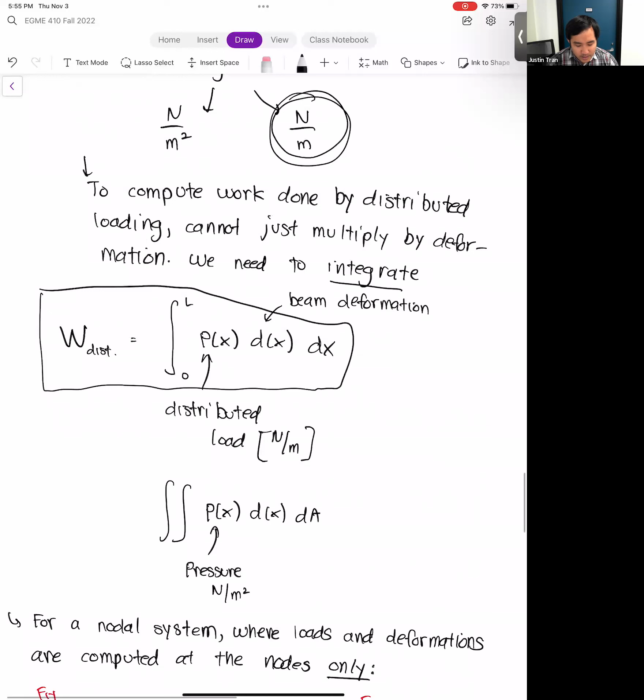All right, any final questions on this? Are you allowed to resubmit the final project? What do you mean by that? You're only submitting the final project once. Oh, before, yeah. If you submit it before the due date and you want to make some changes, you can submit another copy. That's totally fine. As long as it's before the December 9th deadline or December 19th deadline, you can submit it as many times as you want. Okay. So all that information is on Canvas, so feel free to take a look to your heart's content.

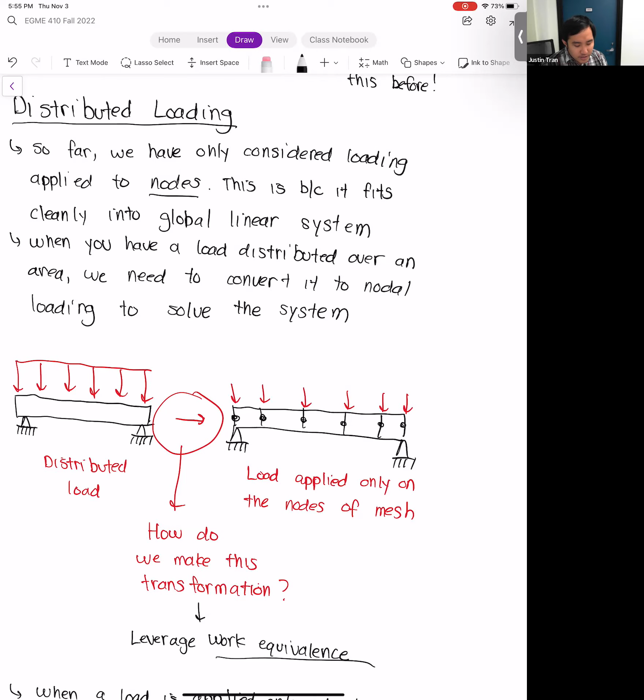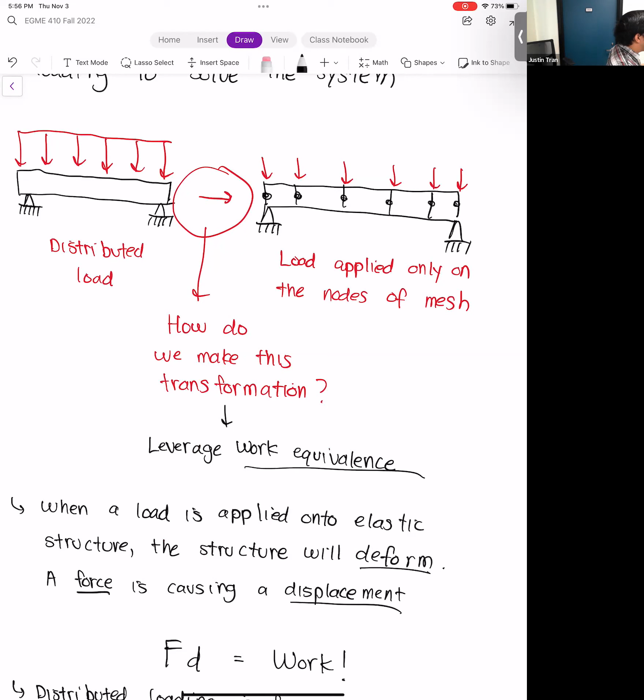Okay, so let's go ahead and come back to where we were on Tuesday. To save myself some time, I'm going to scroll up here, because where we left off on Tuesday was talking about this idea of distributed loading. The idea with distributed loading is that a lot of times when you're doing finite elements, the loads that you're applying onto a subject are distributed over a certain area, over a certain line in this case. But that's a little bit inconsistent with what we've been doing with the direct stiffness method, where all of our loads are applied at the nodes. And so we have a disconnect.

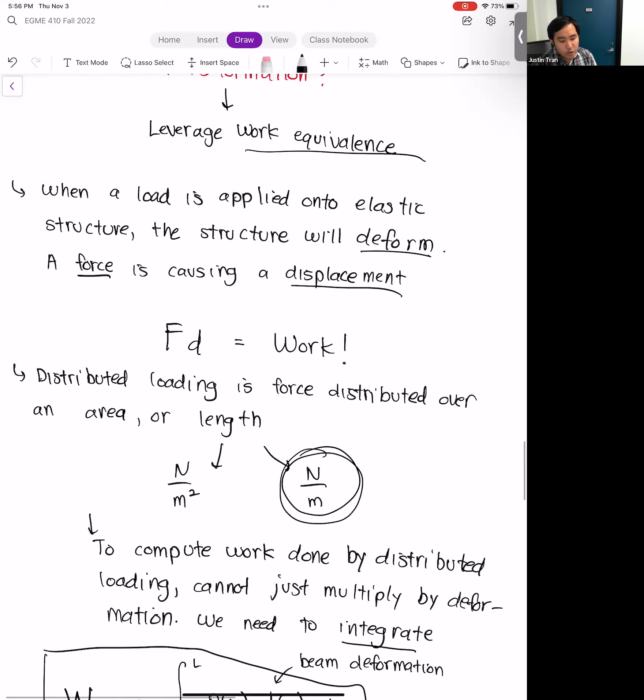On the one hand, we like to apply our boundary conditions distributed over an area, but in order to actually do computations on it, we have to convert those into nodal loads. So what we're doing now is basically looking at a way to do this conversion. How do we go from a distributed load, which is this continuous function, and transform that into discrete nodal points and make sure that they're equivalent? To do this, we utilize this concept called work equivalence.

And so basically the idea behind that is no matter what form the load is, whether it's in a distributed form or whether it's in a nodal form, it's going to perform some work on the structure. And so it's going to cause it to deform. And then if we multiply the force of the loading by the deformation, that's going to give us the work. And what we said is that no matter what form the loading is in, it should perform the same amount of work because it should be the same loading. And so what we have here is kind of these equivalent statements right here.

And so what we say is that if we take the integral of the distributed loading, so this P here is distributed load, where for this part we're going to assume the distributed loading has units of newtons per meter. So it's a line load, a load that's distributed over a line. We multiply by d of x, where this d of x is the deformation of the beam. If we integrate that with respect to dx, which is the dimension along the beam, this is going to be equal to all of our nodal loads.

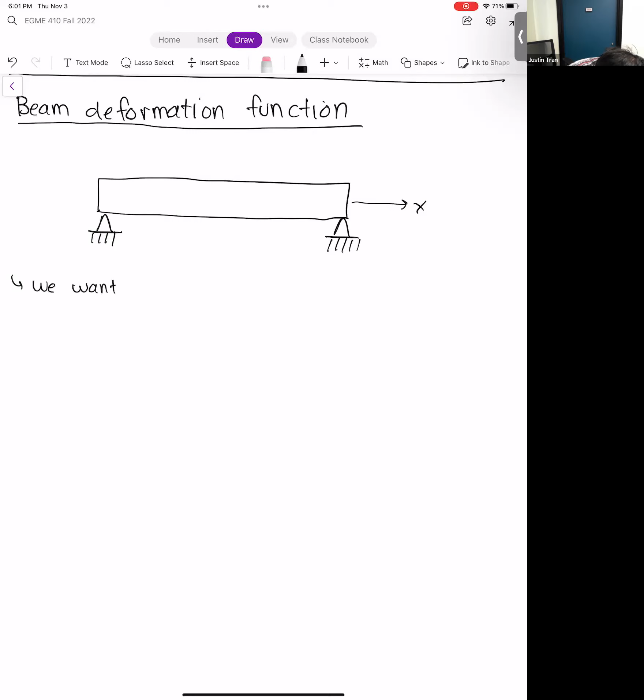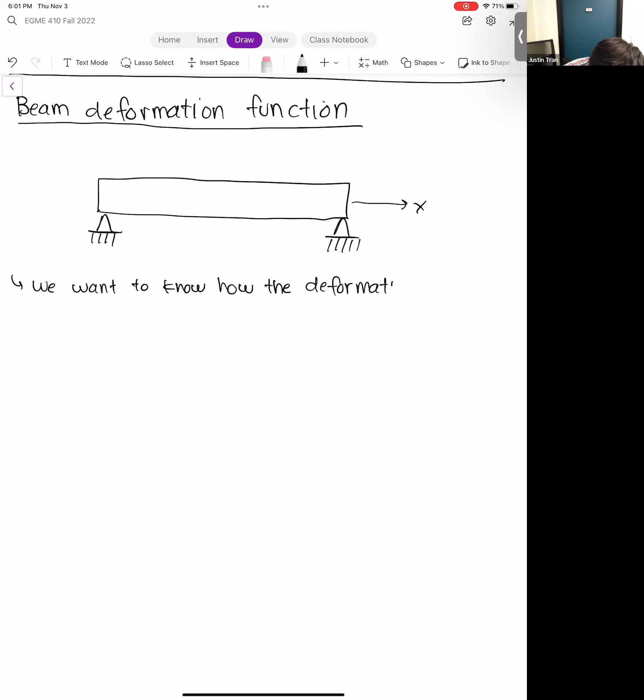Okay, so actually, let me come down here, and let's talk more about this beam deformation function. Draw beam. So here's our beam. We'll assume that the X direction is this way, so the X direction goes along the beam. And so what we want to compute is how the deformation changes as a function of X down the length of the beam.

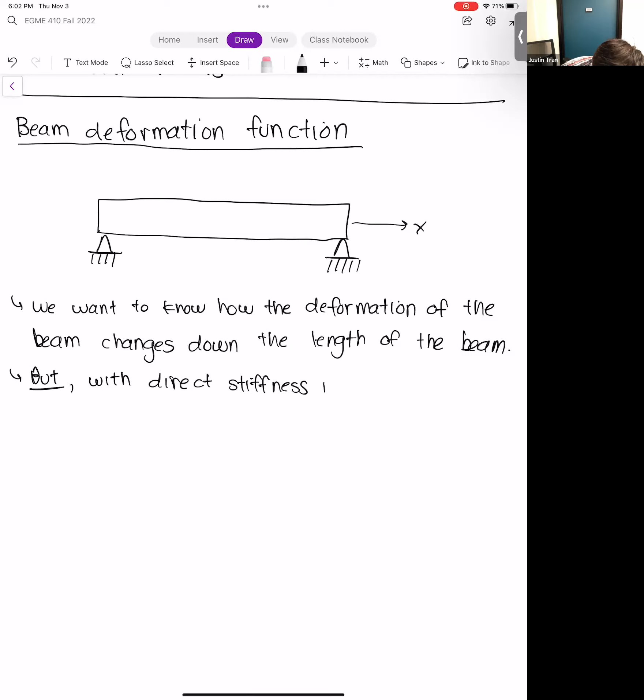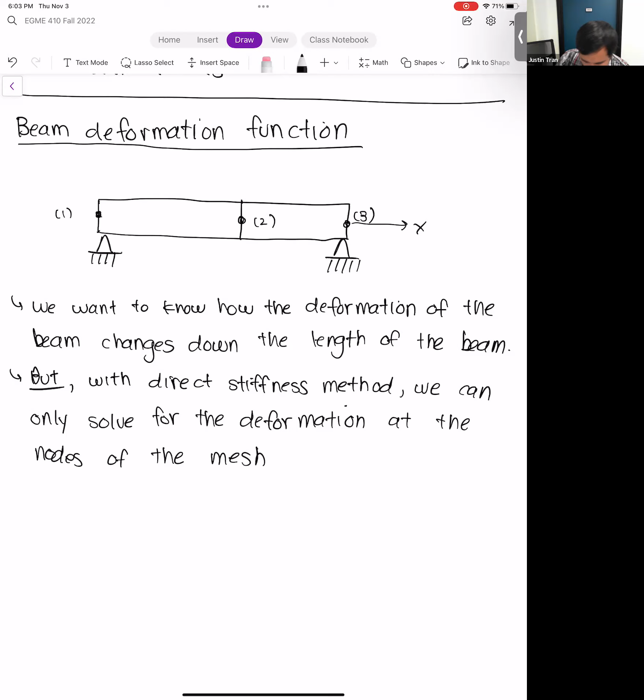The only problem with this is that we haven't come up with such a function yet. If we think about all the direct stiffness problems that we've done, we're only able to solve for the deformation at the nodal points in the mesh. We don't get a continuous function. We only get the nodal deformations. And so we kind of have to reconcile these two ideas here.

Because let's say that we split this beam up into two. With the direct stiffness method, we'll be able to compute the nodal deformations at node 1, node 2, and node 3, those distinct locations. But when we say that we want d of x, we want to know how the deformation varies in the space between the nodes.

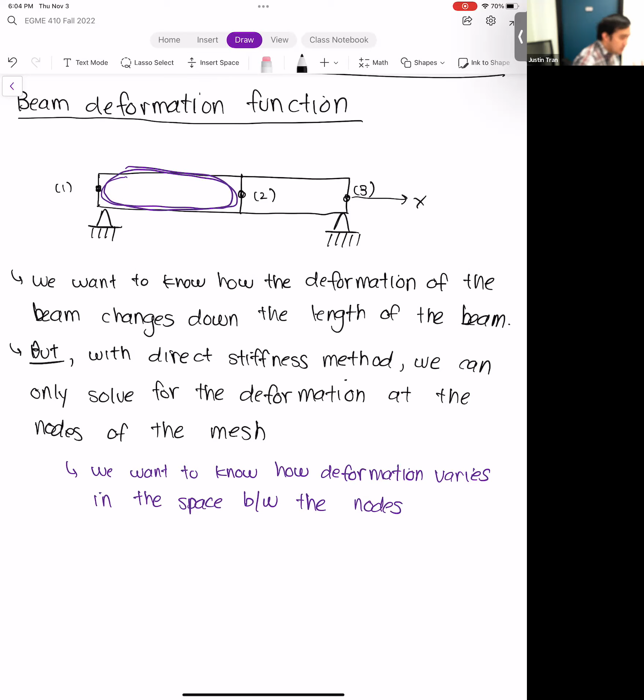So that's going to be our goal here. All right. And so to get that function, we're going to need to bring in a little bit of beam theory. So let's go back and look at our governing equation for the beam. So for a simply supported beam like this, we have E times I times the fourth order derivative of the transverse deformation with respect to x, okay? And this is all equal to 0.

So based on this governing equation right here, obviously it's a differential equation. And so based on this differential equation and based on the nodal solutions, we can come up with a function that kind of satisfies both at the same time. Okay. Sorry, not uy of x, dy of x. I keep changing that.

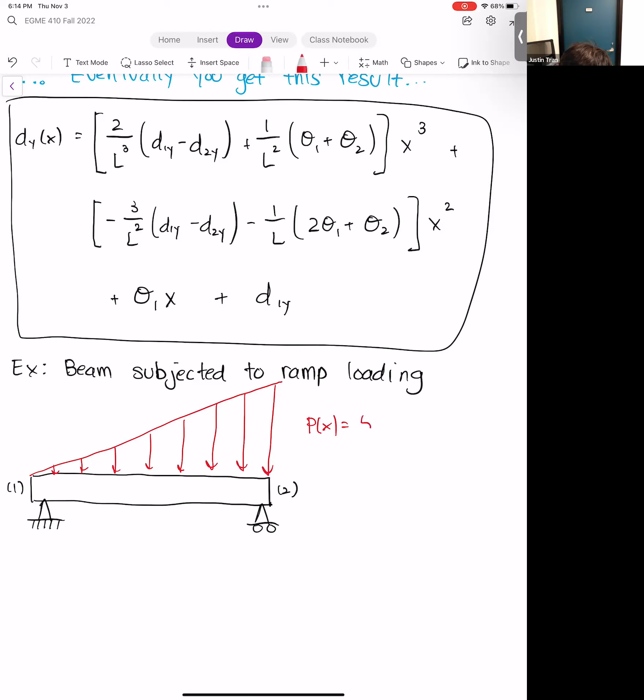Okay, so let's jump into an example to show you how all of this fits together. Let's consider a situation where we have a beam that's subjected to a ramped loading. Here's our beam. I have node 1 on the left, node 2 on the right. And the load on here is going to start at 0, and it's going to ramp up just like that.

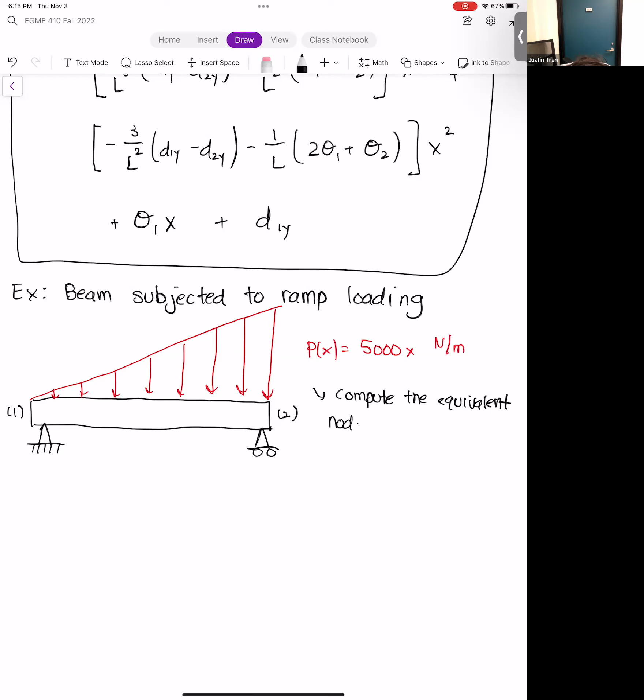The function for this loading is going to be 5,000 times x, and the units are newtons per meter. So you can see our loading function is a linear function. It starts out at 0 and ramps up as you get to higher values of x. So we have 5,000 x. In this problem, we want to compute the equivalent nodal loads at points 1 and 2.

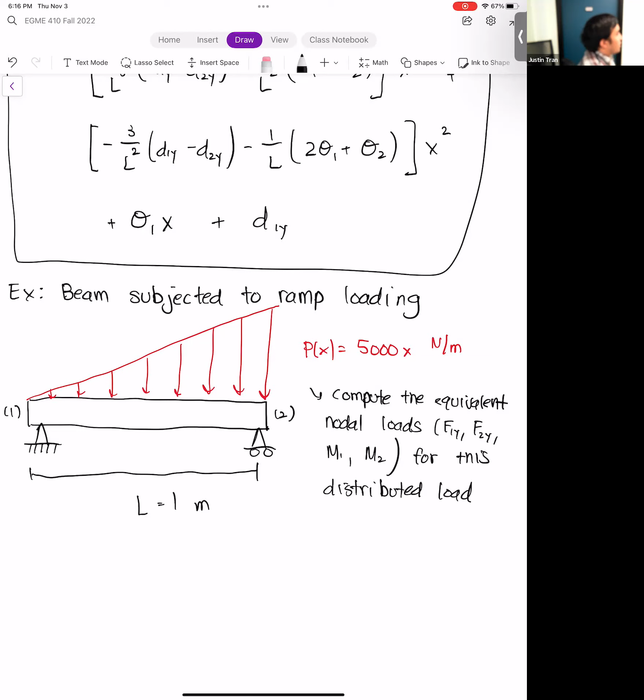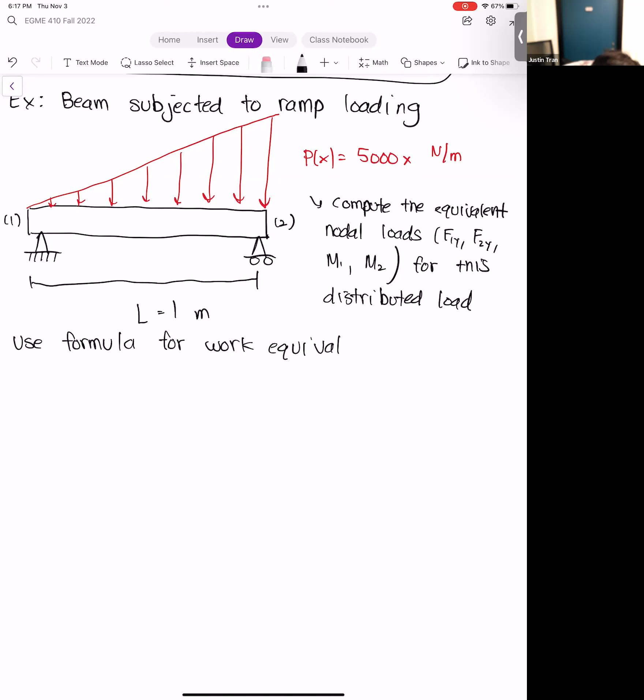Basically we want to compute the values of F1y, F2y, M1, M2 for this beam. And just for simplicity, so we don't go crazy with algebra, we're going to assume the length of the beam is 1 meter. We're going to use our formula for work equivalence together with our beam deformation function, which we have above, together with our distributed loading function. We're going to evaluate all that, and then we'll get our solution for F1y, F2y, M1, M2. So that's the setup for the problem. Any questions on this? Okay, so let's go ahead and do it.

So we're going to use our formula for work equivalence. We have integral 0 to L, P of x, multiplied by dy of x, dx. This is equal to F1y d1y plus F2y d2y plus M1 theta 1 plus M2 theta 2. Remember, what this formula is saying is that the work performed by the distributed loading P of x has to be equal to the work done by its equivalent nodal loads. And we know P of x is 5,000 times x, so let's plug in for that, and let's plug in our beam deformation function.

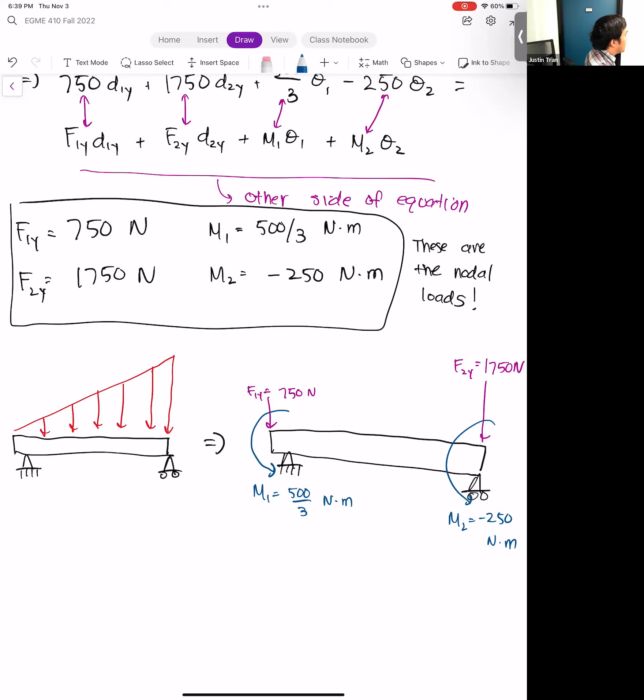And then the moments that we apply, we have a moment of 500 over 3. So we have M1 is equal to 500 over 3 newton meters. Okay. And then we have a moment M2. M2 here is going to be a minus 250 newton meters. Okay. Yeah.

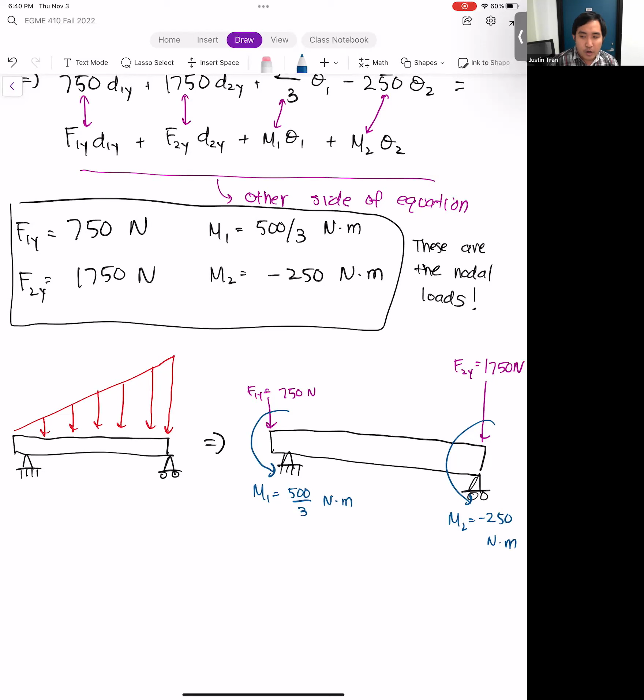It is in the opposite direction. But if I drew it in the opposite direction, then I would have to make it a positive 250. And so I drew the arrow going counterclockwise, and then the negative will swap it back. Yeah, so the true direction for M2 would be in the clockwise direction, but then the sign would change that.

So these distributed loading problems, they are quite time consuming, but the nice thing about this is that most of the time ANSYS is going to handle this for you, and so ANSYS will kind of do this automatic conversion, so you don't have to. But just know that even in ANSYS, this is still happening underneath the hood, because in order to actually apply any kind of loading, you have to know what its value is going to be at the nodes, and so this is kind of a necessary step.

Any final questions on this before we wrap it up for the week? Okay, all right, so that's all we got time for. And so, that's going to be it for the direct stiffness. So this is going to be the cutoff for the midterm exam.

Okay, and so on Tuesday, we're actually going to get back into ANSYS. And so next week's an activity week. And so Tuesday, we're going to go over how to do unsteady simulation in ANSYS. And then Thursday, we're actually going to implement. So, I know it's quite a few things happening at once, but this is it for the theory.

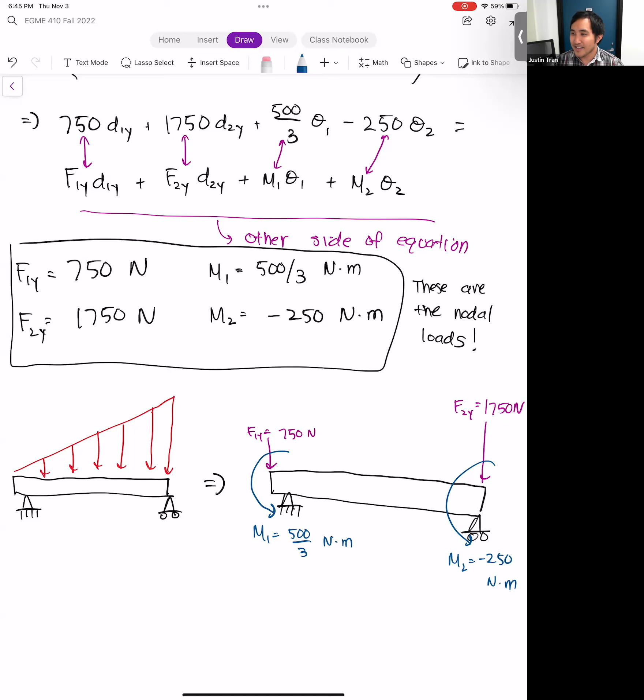So basically, to study for the midterm exam, the problems are going to be very similar to the problem set that's out there right now, and then the study guide will help you with the conceptual information. So if you use those two and you're good on those things, that's probably as good as you can prepare for the exam. Okay. All right. Perfect. Thank you. Yep.